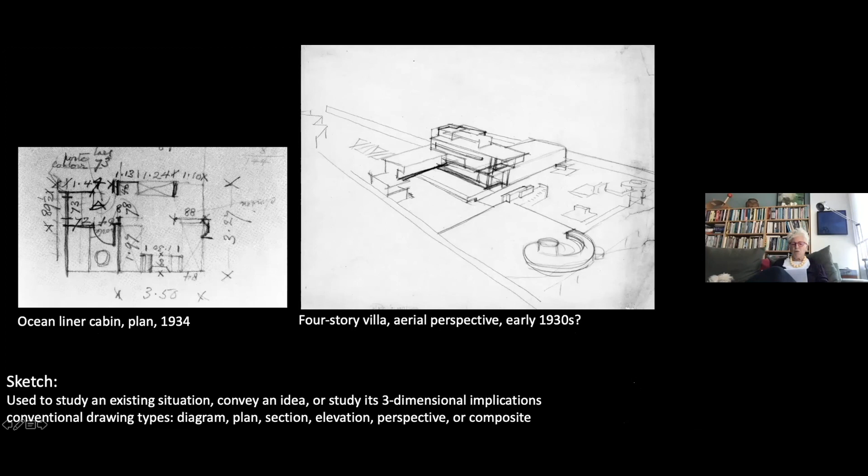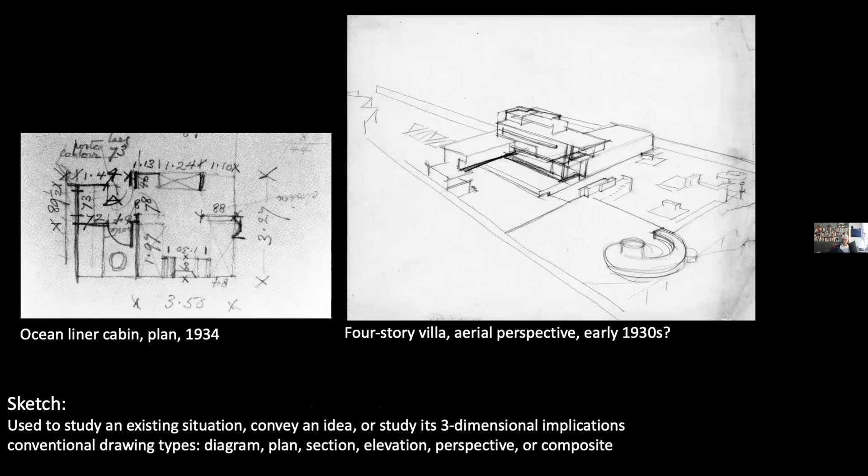Then an aerial perspective of a four-story villa, which I believe was a private commission, though she claimed she didn't have private commissions. This is just studying the three-dimensionality of a scheme for which there are more elaborate plans and elevations in her archive.

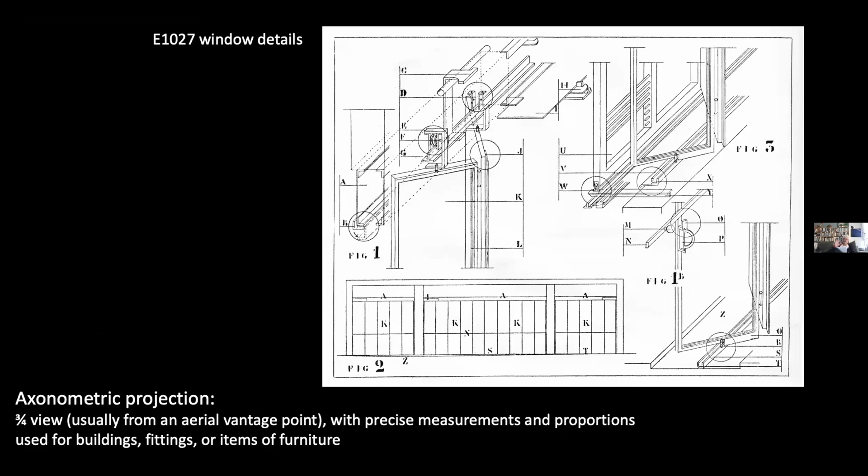Axonometric projection is a measured drawing with dimensional precision, maintaining scalar proportions, often from a three-quarter view. This is an image of some of the window details at E1027, the most famous house that she designed. I'll talk about that more later when we get to it.

The composite drawing, in which plan, section, and elevations are combined and projected from each other so that they correspond, was a really favorite device that Gray used to represent her ideas. I'm speculating that it's an idea or form that she got from Jean Badovici, who seems to have also used this drawing type prominently. So it's studying the interrelationships among plan, section, and elevation.

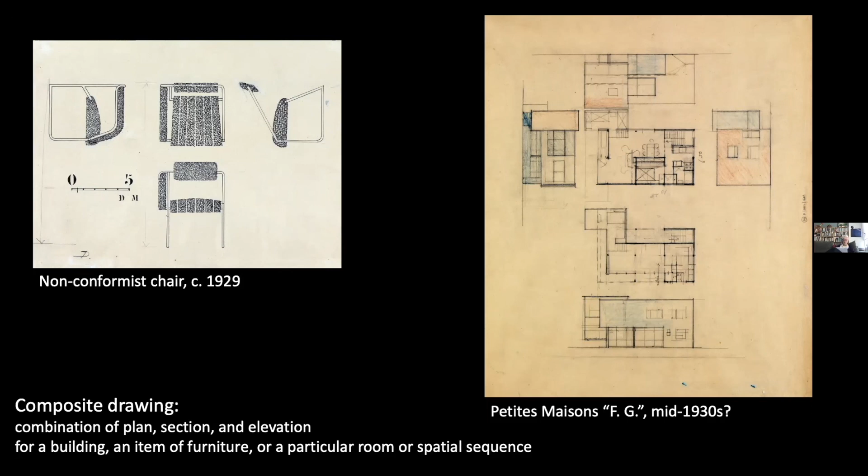These are measured drawings again, with precise measurements. She used this for the nonconformist chair that she designed for E1027 in about 1929, as well as for this small apartment building that she designed possibly in the mid-1930s.

Then there's a special use that she made of the composite drawing, a variation I call the fold-out plan and elevations, which she used for rooms. This is a form of drawing that had been used in the 18th century, which Gray adapted to her particular ideas about spatiality and the qualities of inhabitation in a room. I'll describe that a little more carefully later on.

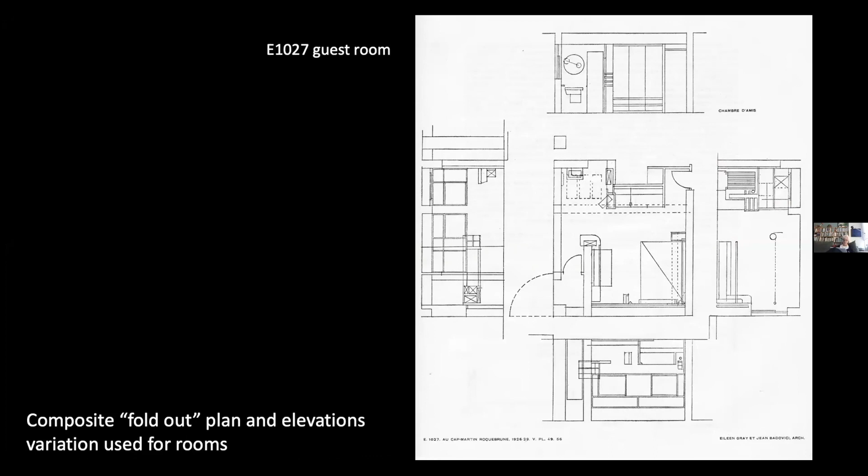So we see evidence of Gray's architectural thinking relatively early in her career, during the period in which she's designing interiors and furniture for sale at her Paris Galerie Jean Désert, which we see here. Could you tell us a little bit about this project and the few drawings that survive?

Yes, so the Galerie Jean Désert opened in Paris, I think in March 1922, but I'm very bad at dates—I know that was the year. I believe this was her first tentative venture into architectural design, most likely carried out with the assistance of Jean Badovici. I'll show you the drawings that I'm using to justify this argument next.

This is a small perspective sketch of the entry to the shop, which is in her archives at the V&A in London, and I think it shows her initial concept for the design. It's a perspective, but if you try to actually follow the lines, it doesn't really make sense three-dimensionally. I think it illustrates that at this point in her career, she wasn't really conversant with the full means of architectural representation. What's important about this sketch, I think, is that it represents the rejection of the conventional display window that optimizes the views of objects on display.

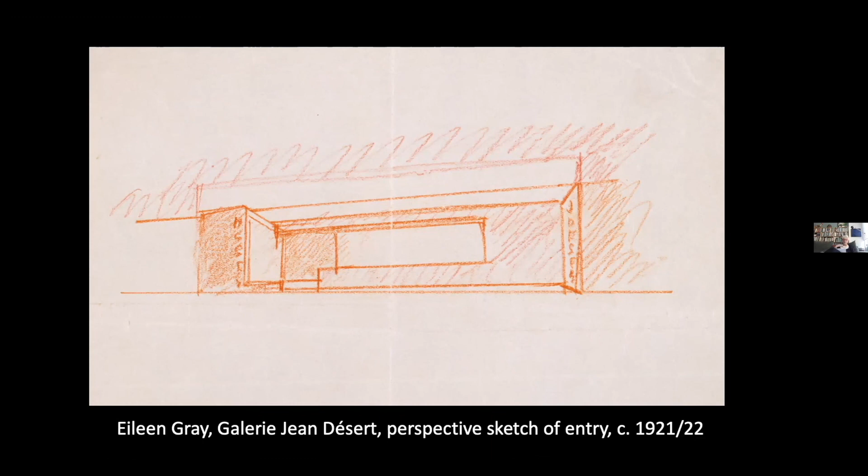Let's go to the next one first. Another sketch, which she included in her notebook 'Notes on Light,' is a section through the facade of a shop, presumably this shop. You can see the figure standing on the sidewalk and looking through to a kind of raised portion that is subdivided by vertical plates of glass, so that natural light could be admitted into the basement of the shop, but the viewer walking by could not see into it.

So looking sort of indirectly, again this notion of enticing you to view into the interior. But you notice the very naive, childlike quality of Gray's sketch.

So she's conveying this same idea, but again, without a sophisticated idea about architectural representation.

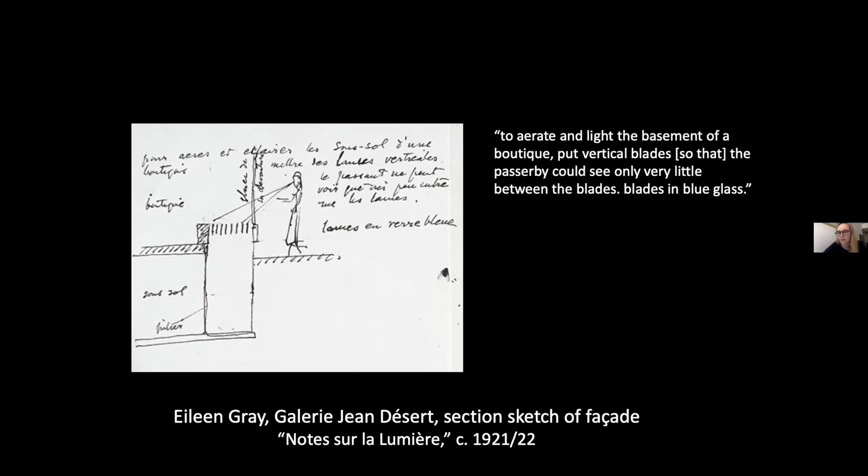Typically we know Jean Badovici as Gray's collaborator on her most famous house, E1027, and we think that they met sometime in the early 1920s. Could you tell us a bit more about why you think this was a project they both worked on?

But there's no evidence that she was capable of making an architectural drawing such as this as early as 1921 or 22. And we know, as Emma said, that she met Jean Badovici sometime in the early 1920s, and that they worked collaboratively until 1931.

Nevertheless, it's very hard to determine the precise contribution Gray made to their collaborative efforts in relationship to those that Badovici made. To reiterate, most of Gray's drawings are unsigned and undated. And so there's this, I think, problematic propensity for certain scholars to attribute much of the collaborative work to Gray alone. It is very clear, I think, that Badovici played an important role in this project.

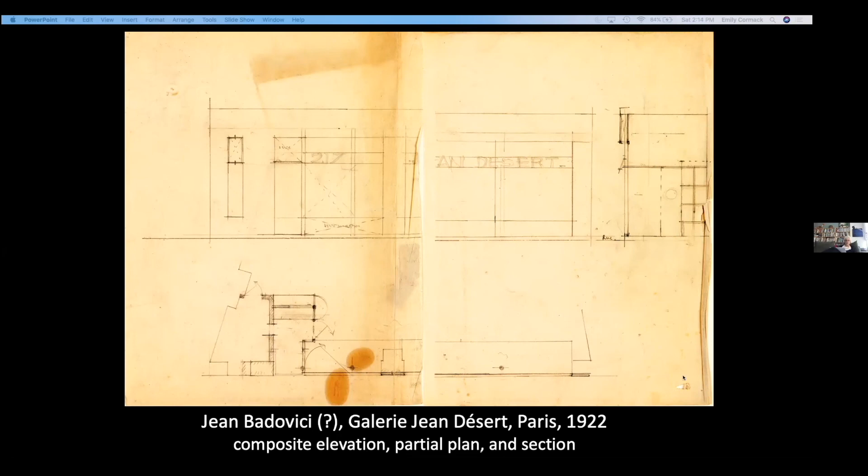So again, this kind of tactic of delayed gratification, inducement to entry, which was soon adapted more broadly for Parisian shop fronts, although critics attributed the idea to others. I think it really started with Gray, even if others weren't aware of her ideas.

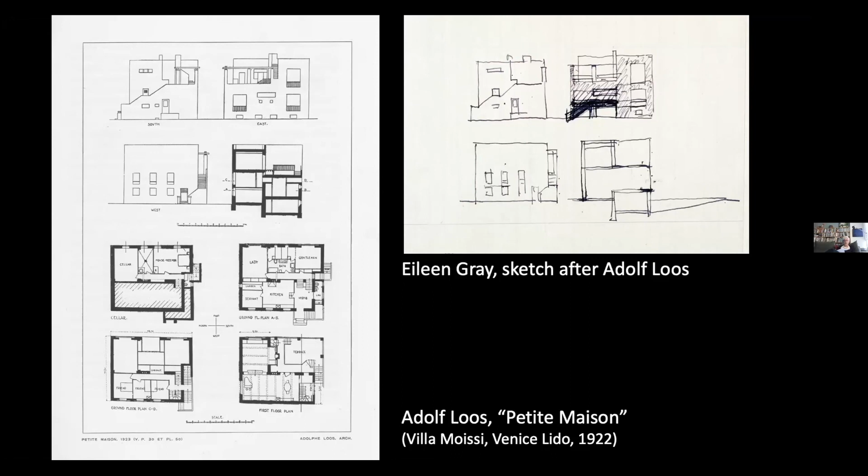Yes, you're right, this is not a manner of drawing she would normally use. She rarely drew axonometrics, and particularly she didn't use color in this way in her drawings. Perhaps this was a way, I'm just speculating, of distinguishing this early design from the work of Le Corbusier, whose contemporary designs were very much in her mind at the time.

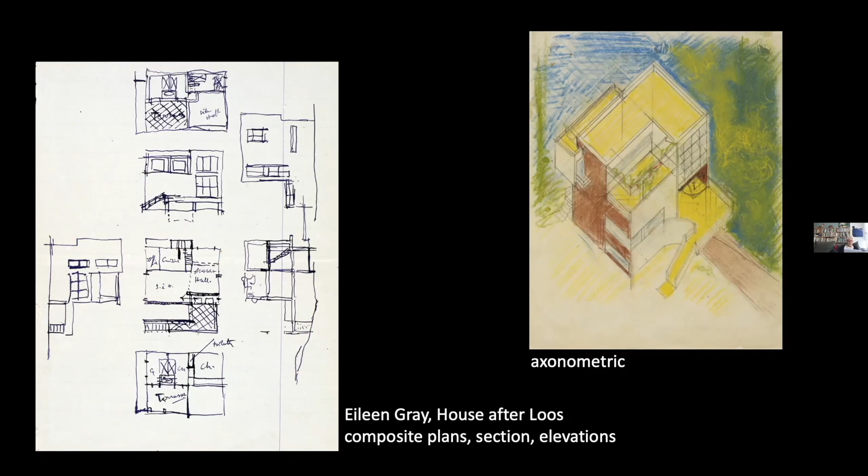So now we'll move on to Gray's most famous house, E1027, which she designed for and with Jean Badovici only a couple of years after working on the house for Loos. Can you speculate about the role of on-site experience during construction, and how that might have played into her evolution as an architect? And how was the role of drawing for the design process perhaps different from drawing for presentation and publication?

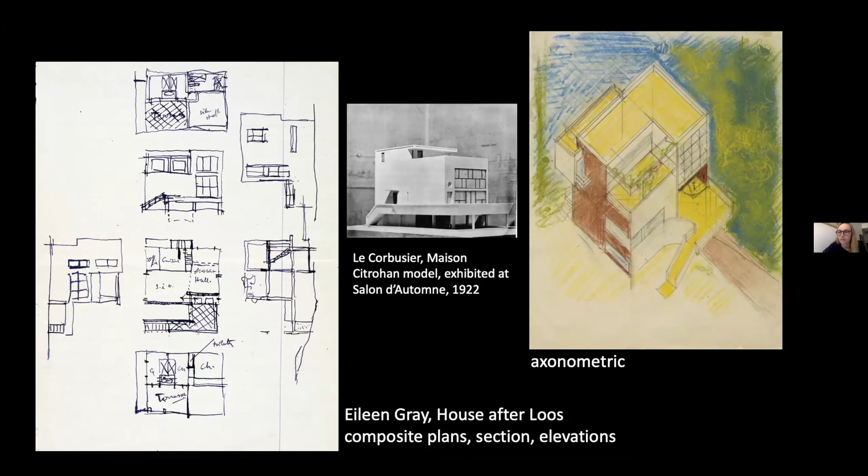Right. So E1027, as many of you might know, was the subject of a special issue of L'Architecture Vivante, published in winter 1929, I believe.

This is the house on which Gray collaborated with Jean Badovici and built for him on the coast of France in Roquebrune-Cap-Martin, from 1926 to 1929. I believe that because Gray was living nearby on another site she'd already purchased for herself around the same time, she spent roughly 3 years on the site.

Badovici would come to visit periodically and offer criticism, but I think Gray really learned how to build and think more clearly three-dimensionally through working with the contractors and specialists involved in the construction of this villa.

I think that was really important to her because she continued to work with certain of these people later in her career. We know that Badovici was the editor of L'Architecture Vivante, and that this is the only volume devoted to a single building, so it obviously held a special place in that re-examination of modern architecture that Badovici was undertaking.

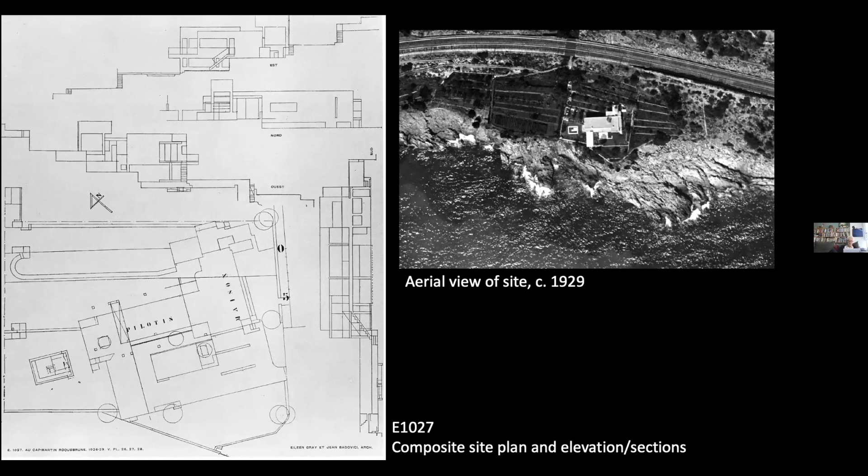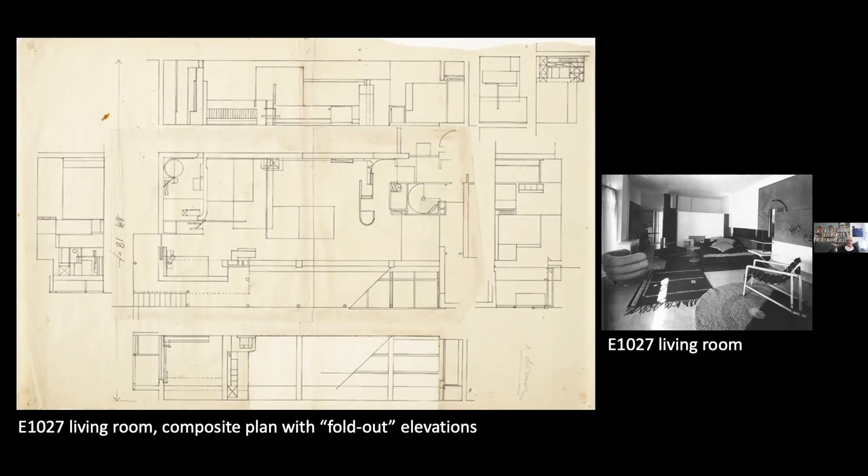Starting from the lower left in the plan, there's a sleeping alcove opposite a dressing room. It's a little hard to read because she's drawing some of her furniture on top of the plan, but the main volume, looking from the right toward the left of the drawing, is the living room—she called it that, using the English phrase. Then there's a dining alcove off to the right. So it's a complex spatiality and interweaving of functional zones in the room, but all compressed within a flat ceiling and flat floor.

We see these overlapping uses for each room, and this idea too in some of the furniture and fittings she designed for the house. A lot of the furniture, as you can see in these photos, is lightweight and relatively movable, so you could move it to different spaces and use it for different things. For example, there was a cork-topped dining table you could drag wherever needed, with cork on top to muffle the sound of silverware so you could eat in peace.

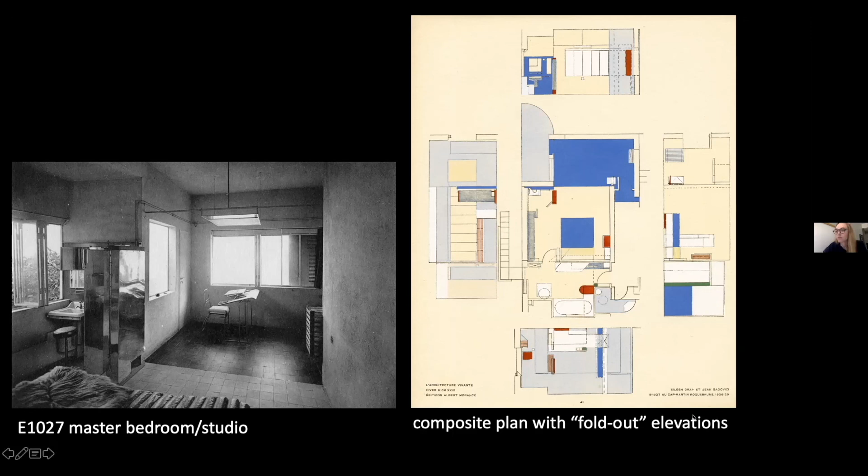She distinguished between furniture that was mobile and that which was permanent and built in. I consider the windows at E1027 an example of that—they're designed in service of the engagement of the human body. Unlike Le Corbusier's strip window, which frames a distant view and brings foreground and background into direct relationship, Gray is more interested in the window as a layered mechanism with curtains and sliding windows that could open fully to admit the most light, the greatest view, and air circulation, along with sliding shutters that could move aside but still protect from midday glare.

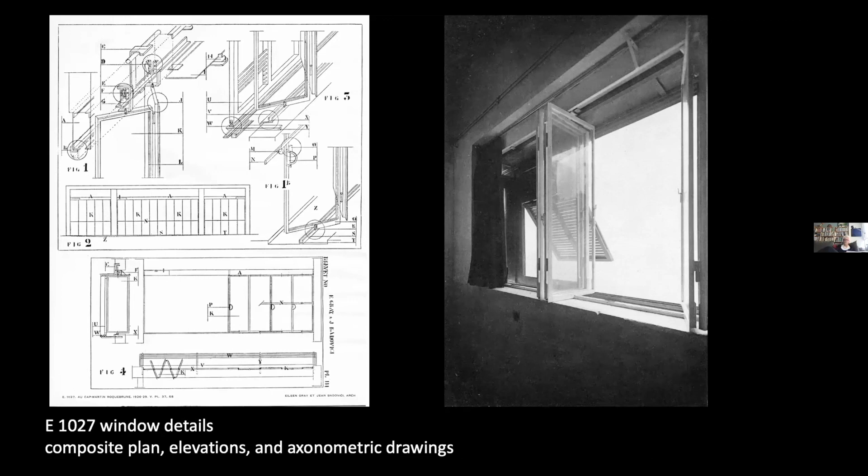I particularly like this bedside table in the sleeping alcove off the living room, which here you see a composite drawing in plan, section, and elevation. She designed this table to fold out and meet the occupant of the bed, with a piece that folds up to hold the book, and above it a kind of reading light, which could alternate with a night light for rest.

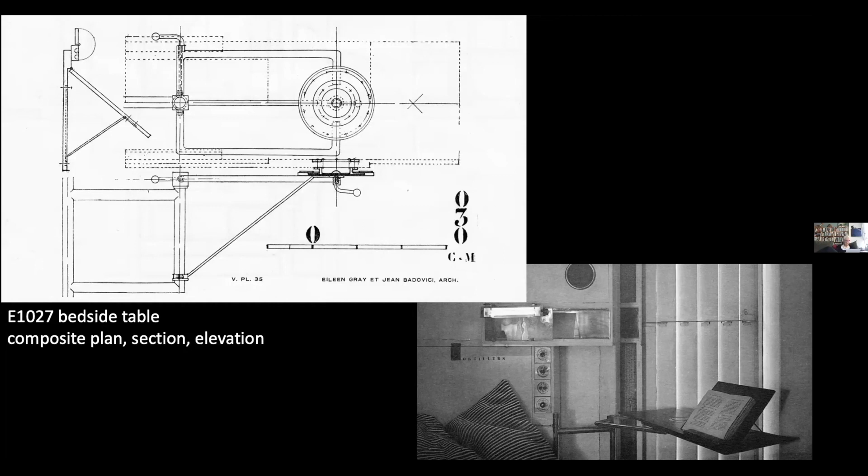But the most unusual drawing type, which I didn't talk about before because it's really Gray's invention, is this plan diagram of the solar impact of the building, together with the modes of circulation through the building. So you can compare the plan of the principal level, which you see on the left, with the diagram I'm talking about on the right.

Here she shows the sun, soleil, rising in the morning, waking up in a sense, and going to bed at night on the left. So she's very interested in the way that the sun penetrates the house and affects how one lives in the house. In fact, in all of her buildings, the bedrooms face the rising sun to the east, and the living room faces the sun, the maximum solar orientation and primary views, to the south.

In this drawing she also indicates the circulation of residents and guests, shown by solid lines that originate on the path toward the house, a small circle on the path toward the house, then move into the house and distribute throughout. Those are all solid lines. Then there are dotted lines that she uses to indicate the housekeeper. It's always been confusing to me why there's a room for a housekeeper when Badovici, I don't think, could afford to have a housekeeper, but that's a complicated question about who actually lived here and why and when.

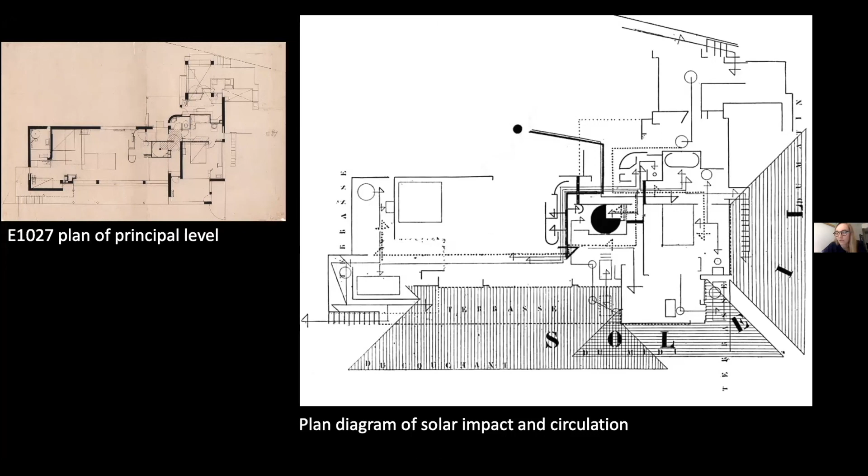Thanks to Tim Benton, I've recently come to question my earlier account, and the recent discovery of further drawings has only heightened my doubts, but I think there's no definitive proof in any direction. In common with many admirers of Gray's architecture, I was perhaps too quick to associate drawings held in her archive with her hand. Others who have worked more closely on Badovici's work as an architect have logically concluded that he was responsible for many of the drawings I originally attributed to Gray.

For example, the Maison Renaudin in Vézelay, 1926 to '31: Badovici was commissioned by his friend, the painter Yves Renaudin, his neighbor in Paris, to renovate a pair of old houses in Vézelay that had been purchased by his mistress, Olga Batachon. This composite plan sketch and partial elevation from Gray's archive includes numerous items of furniture with flexible rotating elements similar to the furnishings she designed for E1027 and for other projects for Badovici in Vézelay. Gray never took credit for any of this work in Vézelay, but she was possibly responsible for the furniture.

So I speculate that this drawing could represent a kind of conversation between Gray and Badovici, in which she drew some of the furniture on the plan, and he was responsible for the architectural drawings. Just to indicate the correspondence between the drawing on the right and the photograph—the right-hand part of the photograph is the facade being looked at directly, just to orient you.

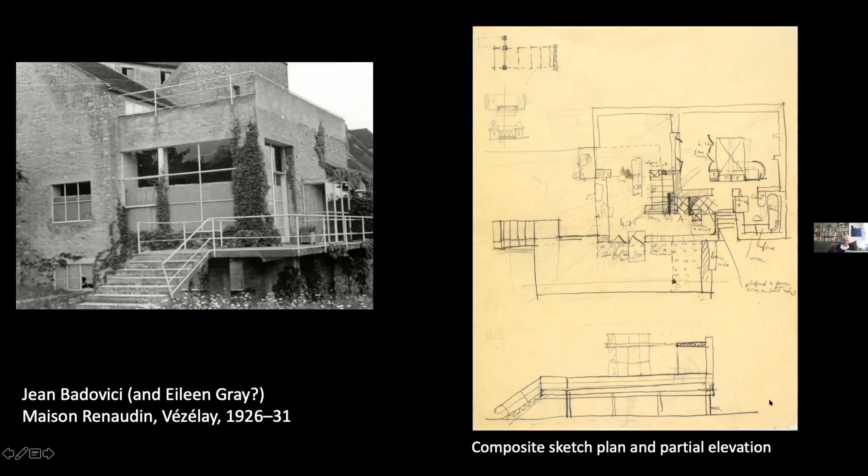Next. And then these two drawings are in the exhibition. They're pretty small, composite drawings of a different version of the same house, an earlier version, because the drawing I just showed you is more like the way it was realized.

But in these drawings, they're attributed to Eileen Gray and Jean Badovici in the catalog, but I question that attribution. Through conversation with Mary McLeod, she suggested they could possibly be the result of Jean Badovici's work with the owner, Yves Renaudin, who was a painter himself, who painted in watercolor. I'm not aware, although Gray used gouache frequently, of a lot of watercolor images in her work. So I think it's more likely that Badovici and Renaudin worked together on these drawings.

And in fact, we know that Renaudin supervised the construction in conversation with Badovici.

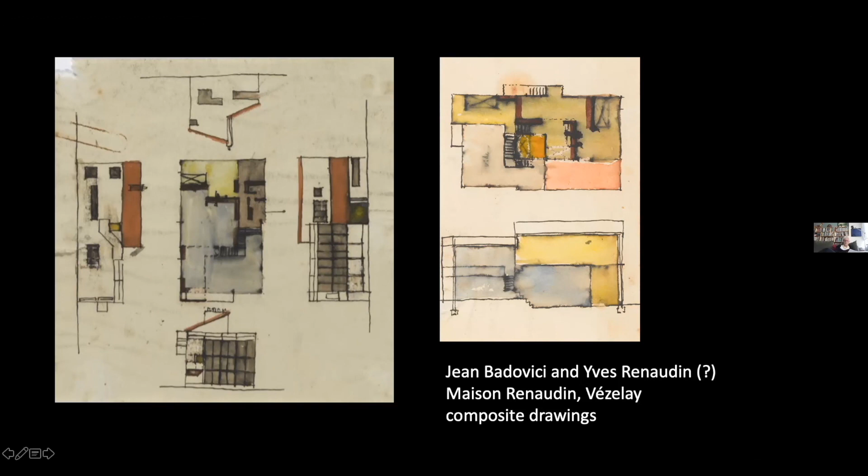Next. And I would say a similar thing about the Badovici house in Vézelay, 1927 to '31, because the next year after Renaudin purchased these two houses, Badovici purchased two old buildings and began to renovate them also. So here again, we have plans possibly that Gray participated in, but probably that Badovici initiated. They're from Gray's archive in London. And on the right, we have a facade drawing very similar to the one I showed you earlier for the Galerie Jean Désert.

Sorry, my dog is driving me crazy. Stop it.

So this composite drawing, with a partial section, a partial plan, and the elevation itself, is also distinguished by the use of regulating lines, indicating the proportional relationships of the elements of the facade, a device that Le Corbusier frequently used. I'm only aware of Gray using this kind of proportional device in one set of drawings she did later in her career.

Here again, we know that Gray designed some of the furniture for this house, so possibly these drawings were the result of a conversation they might have had about the idea. But the spatial idea of the house is very Corbusian. There's a double-height living room, a narrow ship stair that leads up to a balcony. And we also know that Le Corbusier painted his first mural in the upper level of the living room of this house.

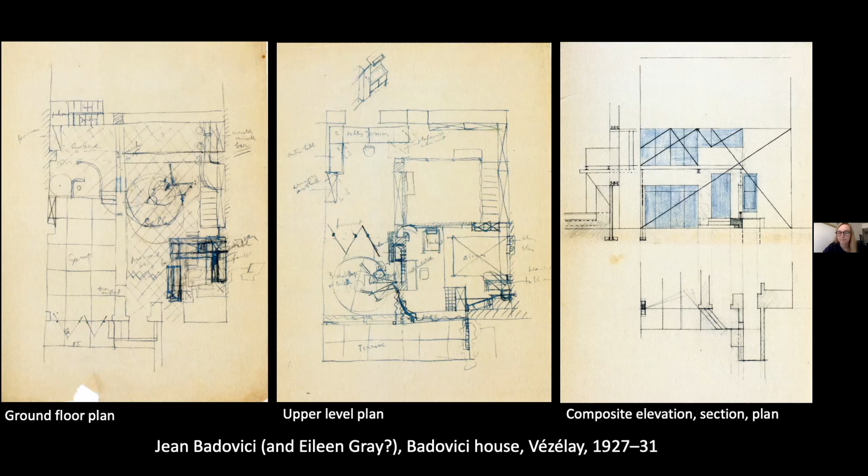Next. So this is an example of a project that Gray and Badovici collaborated on with a secure date and secure attribution. This drawing from the V&A is in Gray's hand. On the upper right-hand corner, you can see her handwriting from when she got older, and it's sort of not such clear handwriting, but at any rate, she seems to have titled the drawing after she drew it.

This is a camping tent from 1931 on which she collaborated with Badovici, exhibited at the second annual exhibition of the Union des Artistes Modernes, of which Gray was a member. That exhibition was in 1932, and it's attributed to both of them. On the right, you see a model reconstruction done by one of my students several years ago.

I really love this project because it's indicative of Gray's interest in the minimal living environment, such as we saw with her sketch of her ship's cabin, and also her interest in the new kind of legislation affording French workers paid vacation leave and so forth. She described the tent as foldable and lightweight, capable of being carried on a motorcycle, and it had plastic discs in the side, which she said, quote, 'wide enough to let the night air through, but small enough to provide a barrier against dogs.' This is what it says in one of her notebooks.

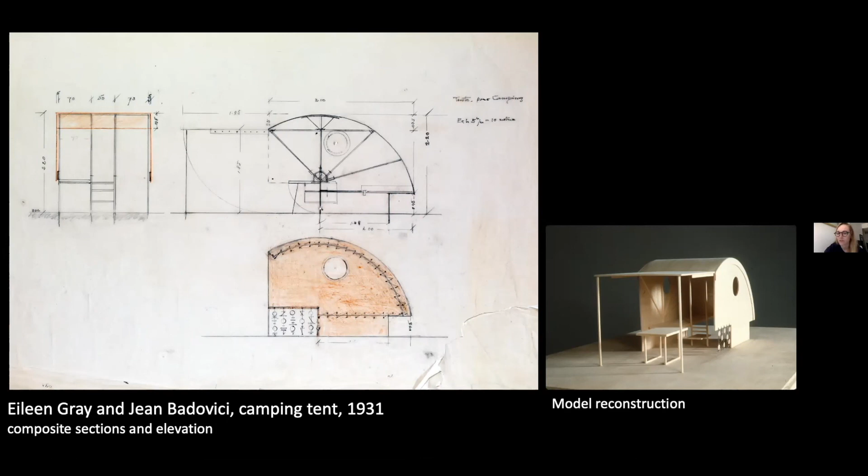Yes, I think actually the subject of their differences could be a full lecture in itself. It's an interesting question nonetheless, but here we see a view from the road of Tempe à Pailla.

Realized between 1931 and 35 on property that Gray purchased, I think in 1926, and the accompanied section drawing to the right. This site had a cabin on it that she lived in, I believe during construction of E1027, but she tore it down, and it also had three cisterns that she maintained and used in her design.

You can see the kind of rough stone walls of the cisterns. In some cases she projected those walls upward. In other cases she kind of cut them down and superimposed her own columnar construction, reinforced concrete, and stuccoed facades.

So what this kind of building on the existing cisterns gave her was an opportunity to differentiate the volumes of the house, much in the manner of Loos's Raumplan. I don't think she was thinking actively about Loos's Raumplan, I'm not sure it was even being speculated about in those terms at this time, but certainly the idea that...

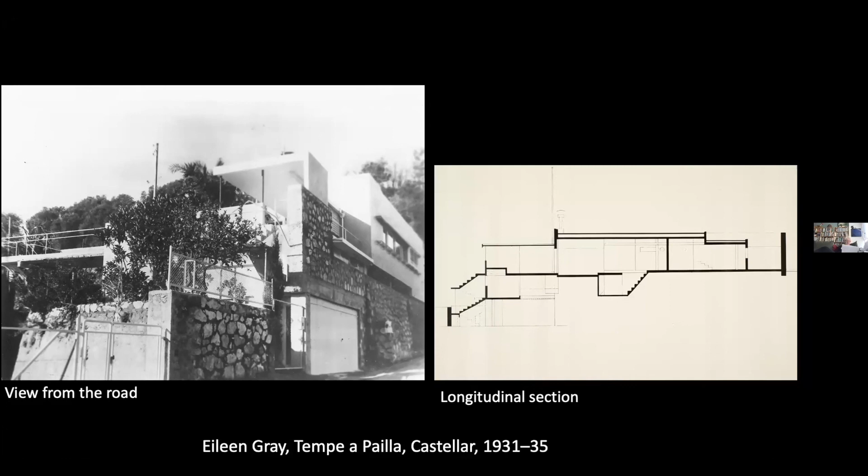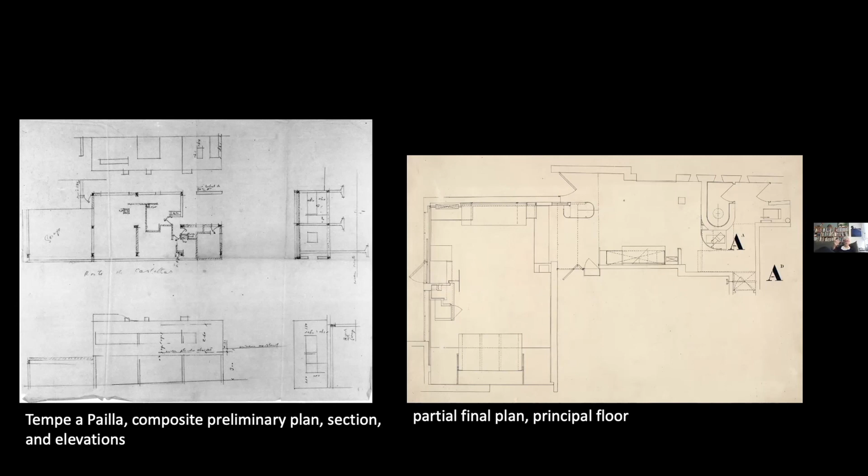Teo, stop it. My dog's driving me nuts.

So we've got the adjustment in elevation to meet the cistern walls that she was very selective about keeping, and the shifting of the walls off the orthogonal to accommodate those walls as well.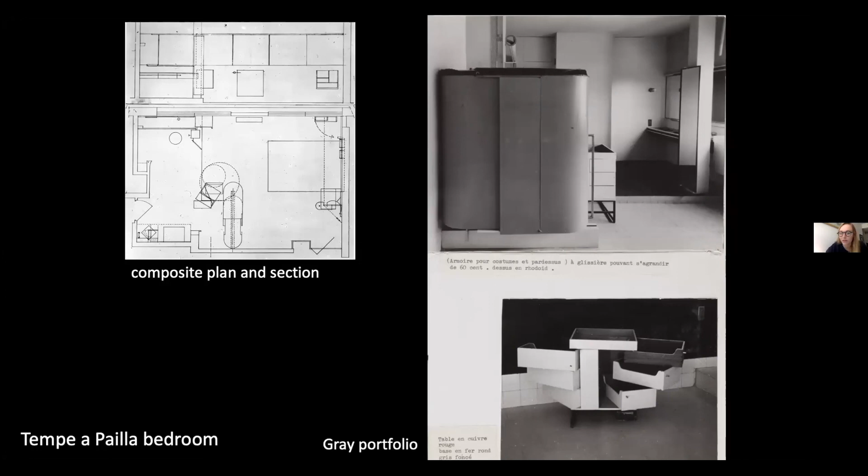So it seems like Gray is always thinking about storage in her design. Could you talk a little bit about the storage at Tempe a Pailla and what we can see in her drawings?

And she did similar drawings in 1931. She finished an apartment for Badovici in Paris that used this kind of mechanism, which she also displayed at one of the exhibitions of the Union des Artistes Modernes. In that case, however, Badovici wasn't involved in the design of his own apartment for some reason—she's credited alone. So we can see her thinking through this kind of idea about storage in section here in these diagrams.

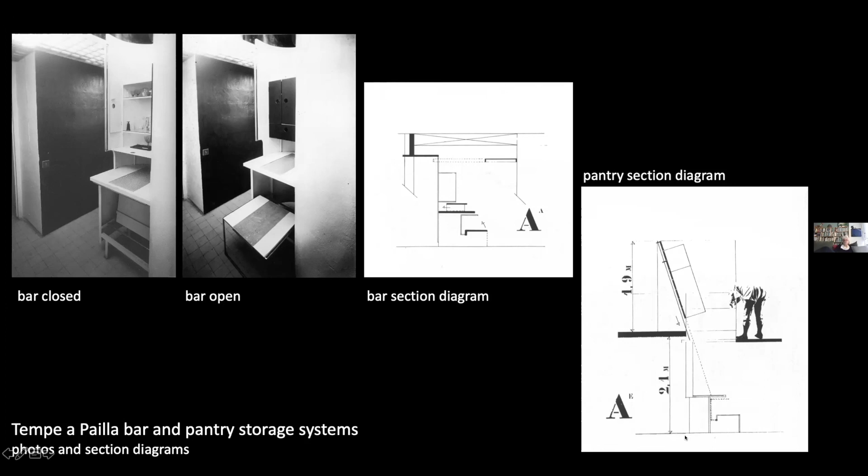And do we also see her making composite room drawings for Tempe a Pailla? Yes, but not to the extent that she did for E.1027. Can you show the next one, please?

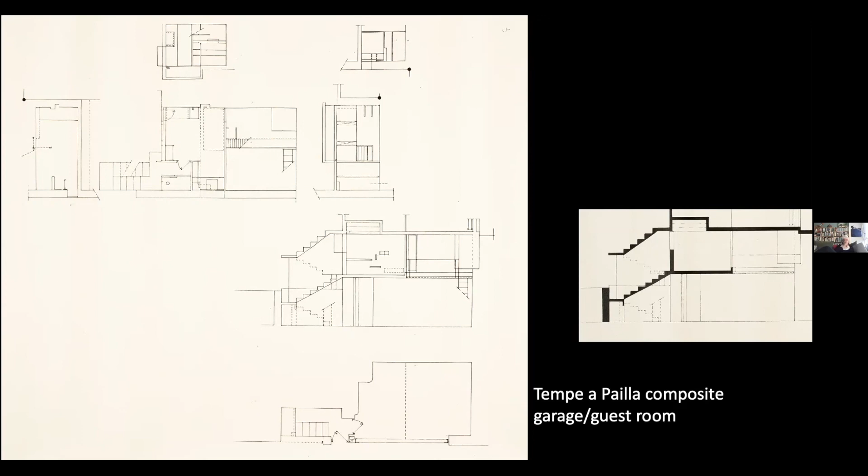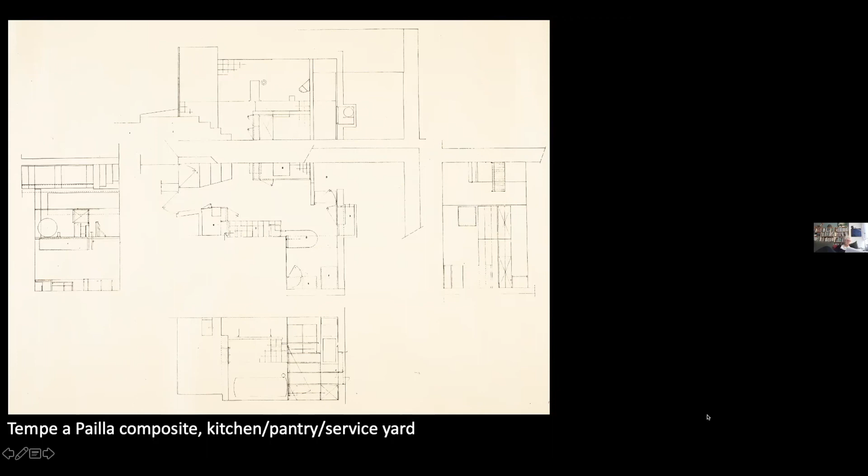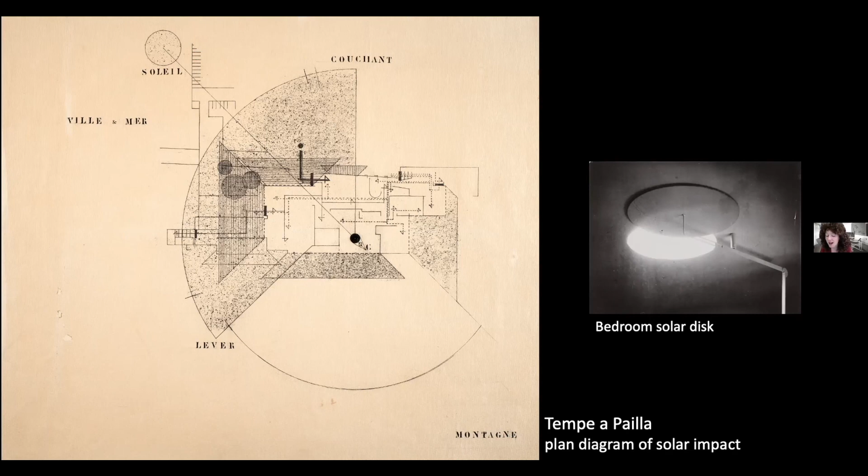But right now I have one question for you, Caroline, from Jacob. Were there any licensing requirements that Eileen Gray had to creatively work around at the time? Licensing requirements for her furniture? Building, likely for architectural requirements, or Jacob, if you want to elaborate a little bit in the chat, feel free. I mean, there's always zoning requirements and so forth, and I'm actually not that familiar with them, to be honest.

Okay, great. I'll move on to the next question. Sorry, Jacob, we don't have a very good answer for you there. So this is from Mary's clarifying for us. Hi, Mary. The word licensing means registration for architects. Got it. Thank you for that, Mary.

Keith wants to know, did Gray produce many speculative drawings of unbuilt work? Many. Many. And they're in the exhibition catalog.

She really worked on architectural proposals for many, many years. I think the most worked out examples are the vacation center that she designed, which Le Corbusier exhibited in his Paris exhibition in 1937, and the cultural center that she designed about a decade later, for which she did very extensive drawings, models, etc. These are, I think, really important aspects of her career in which she was really interested, as I said earlier, in the kind of new freedoms afforded to French workers and their ability to travel and have vacations, and then the government's idea of proposing means to kind of keep people in the provinces by developing cultural centers regionally in France.